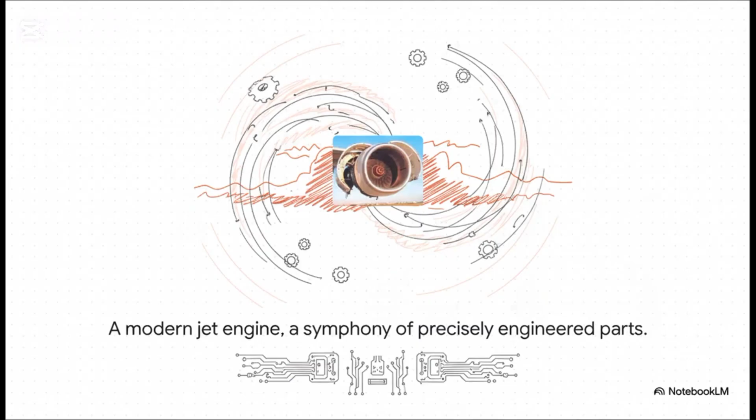I mean, just look at this. A modern jet engine is a symphony of thousands of incredibly precise parts, all spinning at unbelievable speeds, all withstanding insane temperatures and forces. This is engineering at its most extreme. So that's the big question, right? What is actually stopping this thing from catastrophically failing every single time a plane takes off?

And the answer isn't luck, and it's not just guesswork. It's a methodical, rigorous process that is designed from the very beginning to anticipate failure and prevent it. To really understand how that works, we need to get inside the mind of the designer. We need to look at the blueprint they followed to turn a simple idea into a safe and reliable machine.

Yeah, this whole process, it's not some kind of magic formula. It is a structured, repeatable framework that makes sure nothing is left up to chance. You know that reliability we count on every day? It is 100% intentional. At the very heart of all of this is the engineering design process.

It always starts with a problem, like, say, we need a more efficient engine. From there, it's all about research, brainstorming, prototyping. But the absolutely crucial step is the cycle. You build and you test, then you modify and refine, and you do it over and over and over again until the design is proven to work.

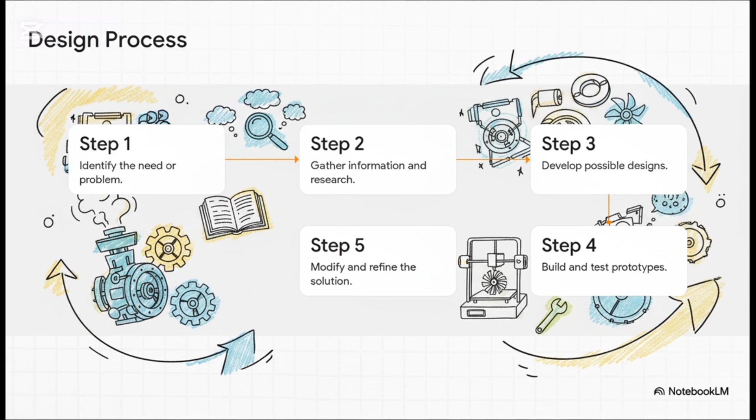Now, to really get this, it helps to see the difference between a scientist and an engineer. A scientist, their whole goal is to understand the natural world just as it is. But an engineer, their job is to take that understanding and use it to solve a problem, to fundamentally change the world by building something new.

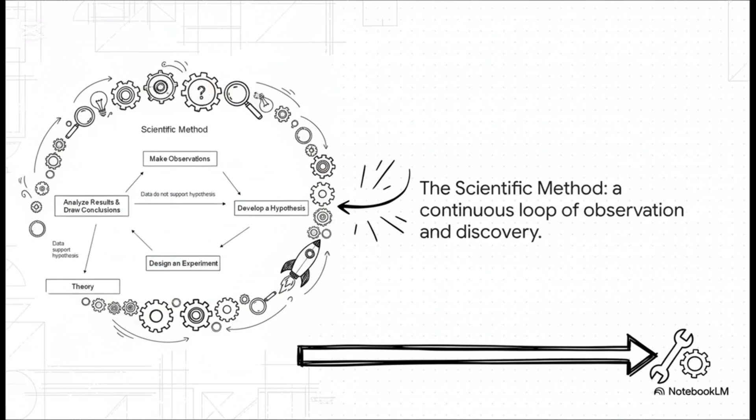You see, the scientific method is a loop, and it's designed for discovery, right? You observe, you guess, you test, you form a theory. The engineering process, on the other hand, is a direct path with a really clear goal: create a solution that works. So, once an engineer has a design, what's next?

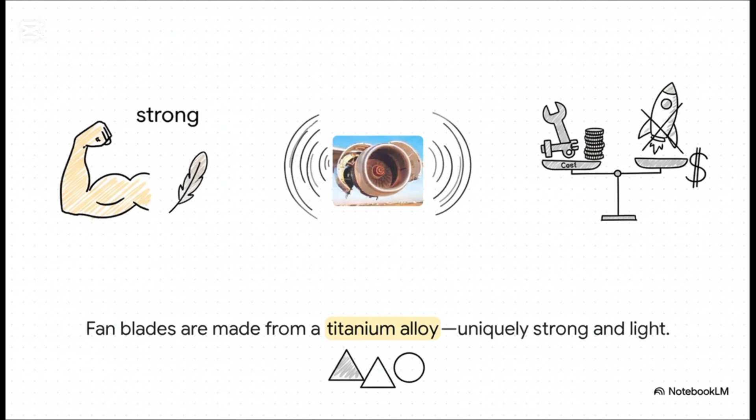Let's go back to our jet engine for a second. Those fan blades are spinning so incredibly fast that the tips are moving near the speed of sound. They need to be unbelievably strong, but also super lightweight. So, what's the perfect material? A titanium alloy. Now, it's expensive for sure, but it is the only thing that can do the job. And that trade-off right there, between cost and performance, that's classic engineering.

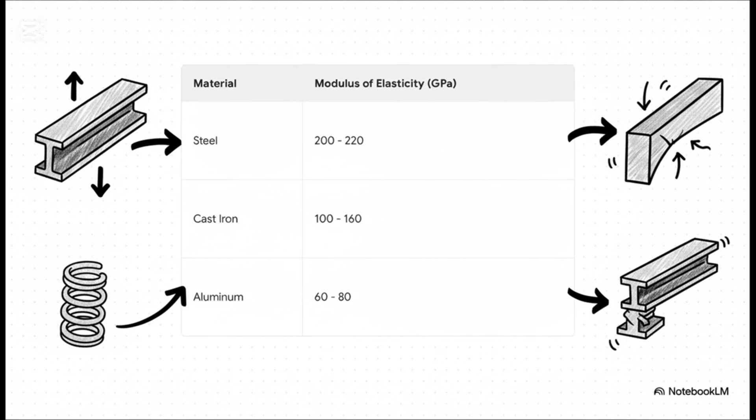Okay, so how do these material properties actually translate into the real world? Knowing the material is one thing. Knowing how it behaves under pressure is a whole different ballgame. And that brings us to stress, strain, and most importantly, safety.

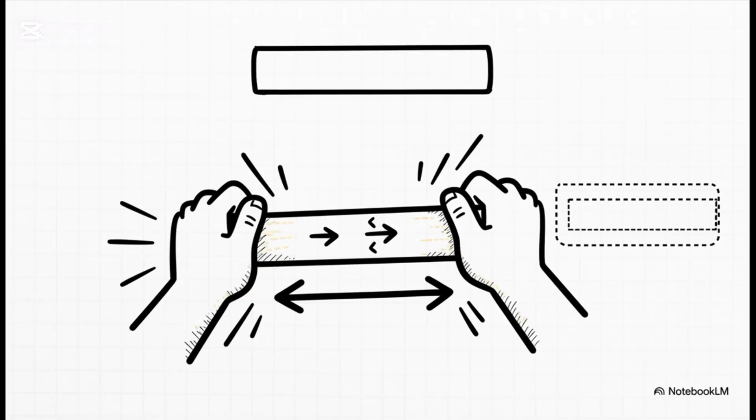These terms might sound a little complex, but the idea behind them is super simple. Just think about pulling on an elastic band. That internal force resisting your pull, that's stress. And the amount the band actually stretches, that's the strain. Engineers calculate these values to predict exactly how a part is going to behave.

So how do engineers guarantee reliability? How do they make sure things don't break? Well, they use something called a factor of safety. Think of it as a calculated buffer, an insurance policy that makes sure a component is stronger than it absolutely needs to be. It's there to handle unexpected loads, little manufacturing imperfections, or just wear and tear over time.

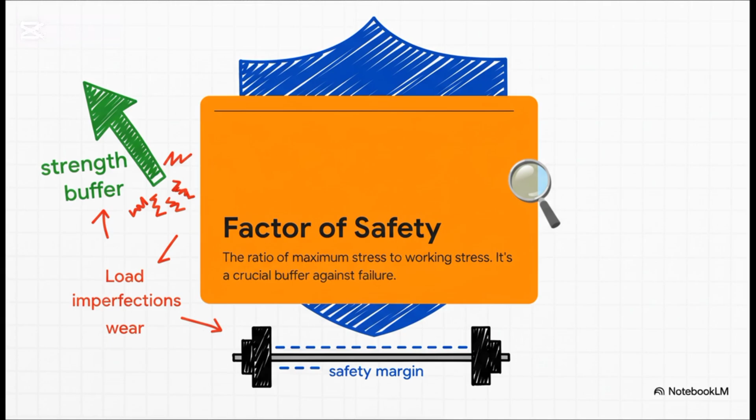And to make that a little more concrete, a factor of safety of 3 is really common. This means that a bridge support, or a crane hook, or an elevator cable is designed to withstand 3 times the maximum load it should ever see in normal use. It is literally an engineered insurance policy.

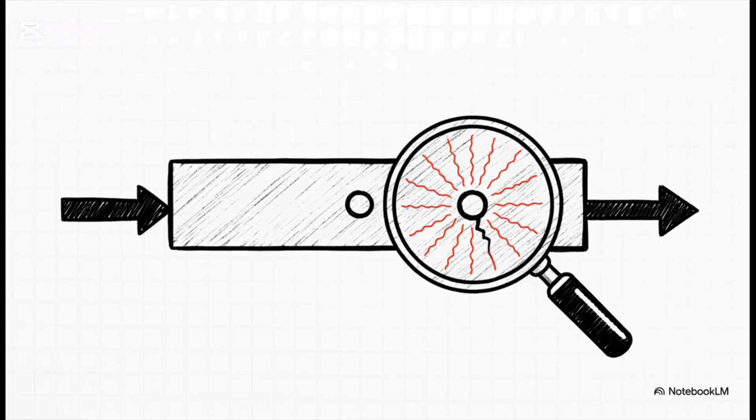But even with the right materials and these safety factors, machines can still fail. And understanding why they break is just as important as knowing how to build them. So this is where we start hunting for the weakest link. And here is a fascinating, kind of counterintuitive truth about all this. Failure doesn't always happen at the point where the force is greatest. No, more often, it starts where the geometry, the actual shape of the part, creates a tiny, hidden point of weakness. This whole phenomenon has a name.

It's called stress concentration. Imagine stress flowing through a part like water in a river. Any sharp corner, or a hole, or a notch is like a big rock in that river. It causes the flow of stress to get all turbulent and concentrate in that one tiny spot, making it way more likely to crack.

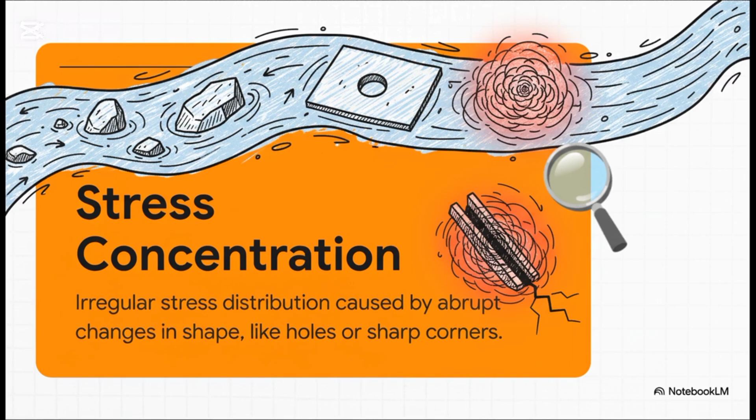Take a look at these splines. They're absolutely essential for transferring power from a shaft to a gear. But every single one of those sharp internal corners is a potential stress concentrator. Designers spend a ton of time analyzing features just like this, adding tiny curves or smooth edges just to smooth out that flow of stress and prevent a catastrophic failure down the line.

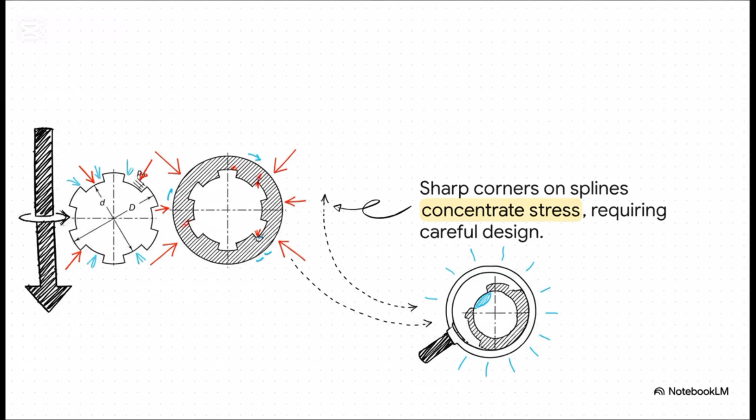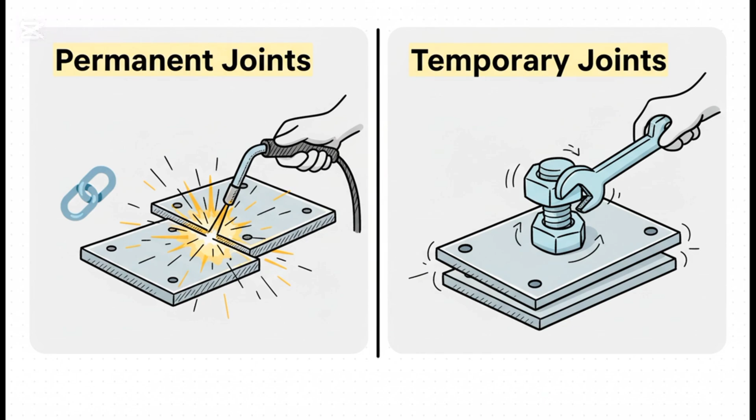All right, so we've designed the individual parts, but a machine is more than just a collection of components, right? They all have to be connected, which brings us to the world of joints and bearings. Fundamentally, you've got two ways to join parts together. You can use a permanent joint like welding, which basically melts the two pieces into one. Or you can use a temporary joint, like a bolt, which is specifically designed to be taken apart. And the choice between them really just depends on the application. Do you ever need to do maintenance or replace a part?

And let's talk about the humble bolt. It is the unsung hero of machine design. Its threads are such a simple but brilliant invention. It's just an inclined plane wrapped around a cylinder. That simple shape multiplies the force you apply with a wrench, creating thousands of pounds of clamping force. It's what holds these massive assemblies together, but still lets you take them apart for maintenance.

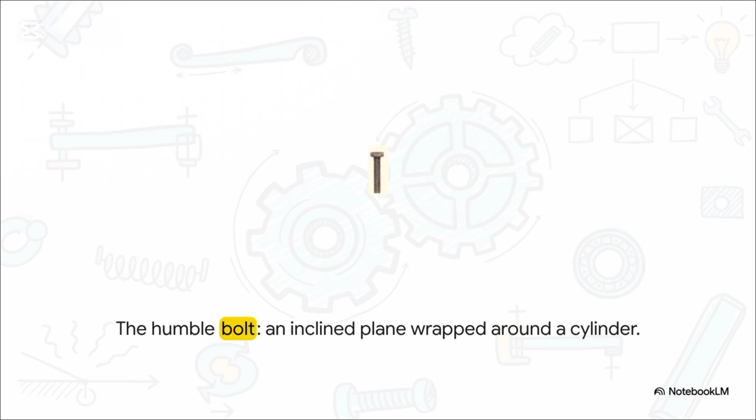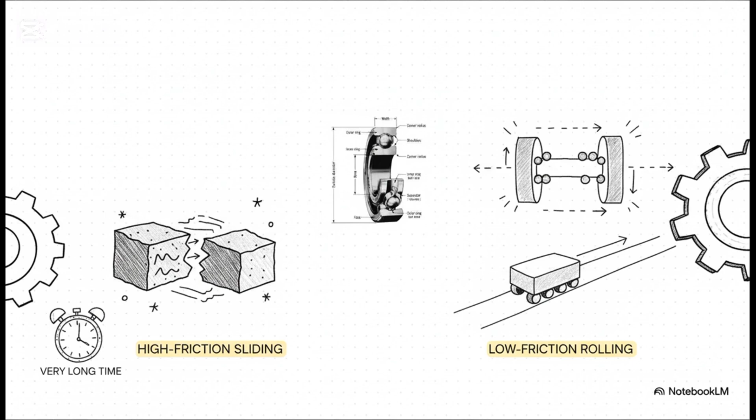And if joints are designed to hold things rigidly together, bearings are what allow them to move. Their whole job is to conquer friction. By placing these tiny, super-hardened balls between a stationary part and a spinning shaft, they replace high-friction sliding with low-friction rolling. It's what allows machines to run smoothly, efficiently, and for a really, really long time.

So from the overall design process to the choice of materials, the calculation of stresses, and the selection of every last nut and bolt, that's the world of machine design. The real question is, now that you've seen what goes into it, what everyday object around you, your bicycle, a coffee maker, even a simple door handle, will you now see as the marvel of engineering it truly is?